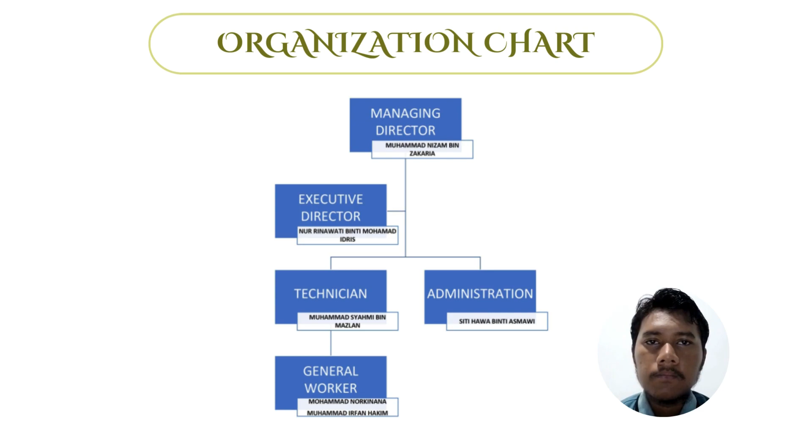Next is the organization chart. Firstly, Managing Director Muhammad Nizam bin Zakaria. Secondly, Executive Director Nur Rinawati binti Mohamad Idris. Thirdly, Technician Muhammad Syahmi bin Mazlan. Then, Administration Siti Hawa binti Asmawi and General Workers Mohammad Norkinana and Muhammad Irfan Hakim.

Next is my scope of work. Firstly, drilling, installation of steel rebar and grouting at the slope, and secondly, making a cube test for grouting concrete and concrete. Thirdly, make an AutoCAD drawing, and lastly, scaffolding installation.

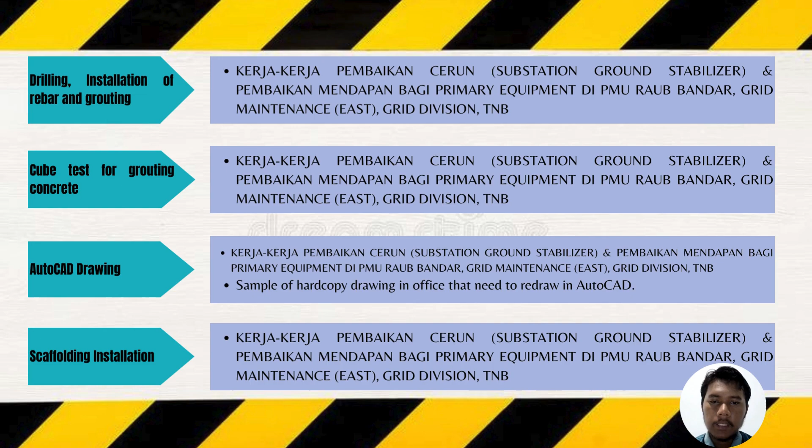For my scope of work, all of my scope of work is mainly in Raub, Pahang. The project in Raub, Pahang for drilling, installation of rebar and grouting, cube test for grouting concrete, AutoCAD drawing, and scaffolding installation.

Firstly, procedure of drilling. There are 5 steps of procedure. Firstly, place the machine on the scaffolding. The machine needs to be tied with a suitable clamp so that the machine is strong. Secondly, connect the wire from the machine to the remote control, power pack, and also the air compressor.

Thirdly, insert the drilling rod into the drilling machine. Before the rod is placed, apply oil to the end of the rod to make it easier to remove the rod when the drilling is done. One rod measures 1.5 meter and 75 millimeter diameter. Total length for nailing are 18 meter, 12 meter and 6 meter.

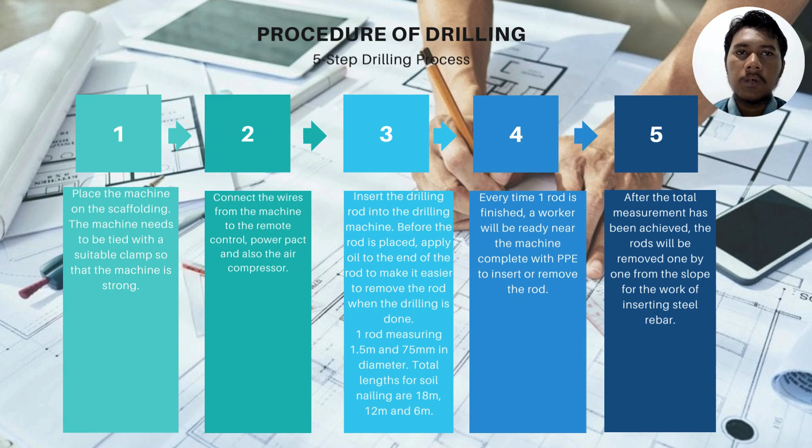Procedure of installation of steel rebar. There are 5 steps of installation of rebar. Firstly, make sure the steel rebar has been checked and has the correct thread on the end. Secondly, the steel rebar length for the lowest, second, third and last slope section of section B should be 12 meter, 18 meter and 6 meter. While the lowest and uppermost slope in section A should be 6 meter and 18 meter.

Thirdly, place the centralizer on the steel rebar. The purpose of the centralizer is so that the rebar does not sag and can fit in the center of the hole of the slope. Fourthly, place the poly pipe and tie it to the iron using iron wire. The purpose is for grouting concrete to enter through the pipe and fill the slope hole.

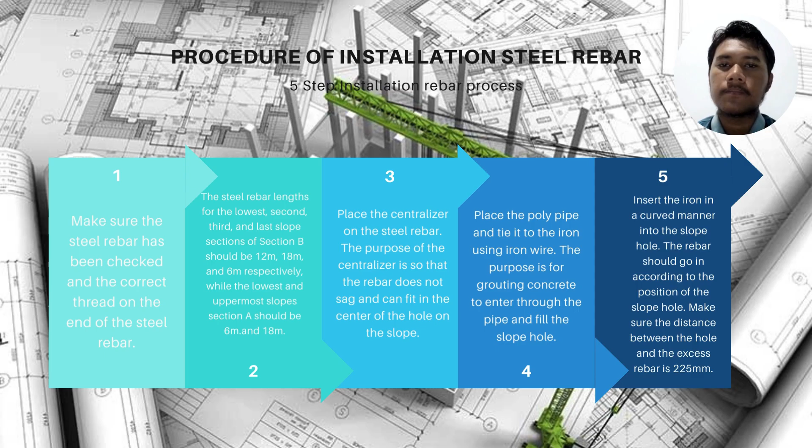Next, the procedure of grouting. There are also 5 steps of grouting. Firstly, use the design that has been prepared. In the design, the required amount of cement, water and admixture has been specified. Secondly, use a grouting machine to mix the grouting mixture.

The mixture will be put into a temporary poly container before the suction is inserted to enter the grouting pipe. Next, after the mixture is poured into the poly container, take some of the mixture and pour it into 6 cubes measuring 100 mm times 100 mm times 100 mm.

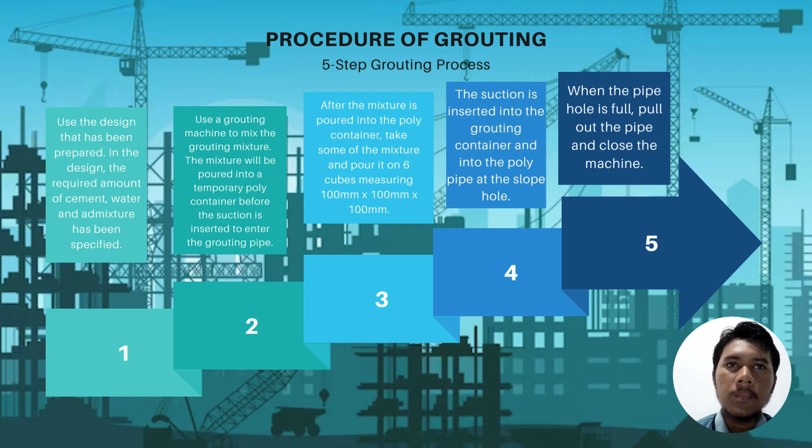The suction is inserted into the grouting container and into the poly pipe at the slope hole. Lastly, when the pipe hole is full, pull out the pipe and close the machine. This is the picture of grouting concrete at PMU Raub.

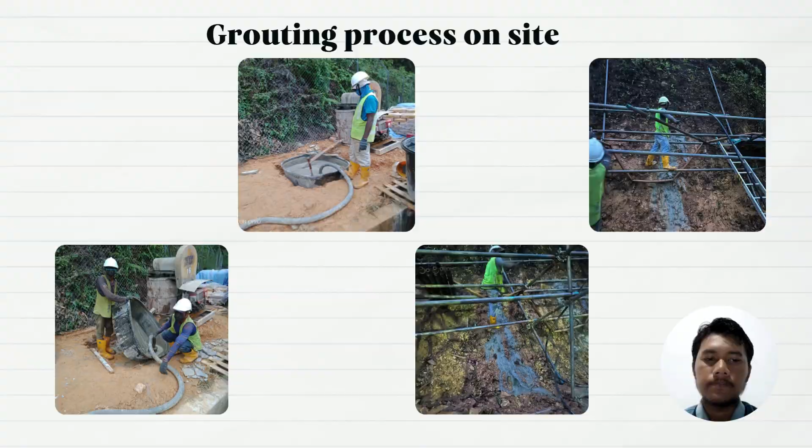Next is the procedure of cube test. Firstly, there are 2 cubes which are 100mm x 100mm x 100mm, and secondly 150mm x 150mm x 150mm. The size of the 100mm cube is for grouting, while the 150mm is for normal concrete.

The mixture has been removed while being poured on the cube. A total of 35 hits are needed for the cube to be compact at each corner of the cube. After finishing, level the surface of the cube using a cement spatula and leave it for 24 hours.

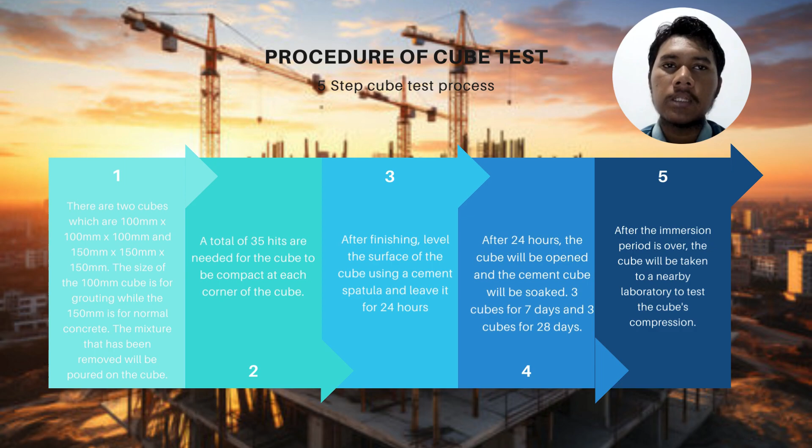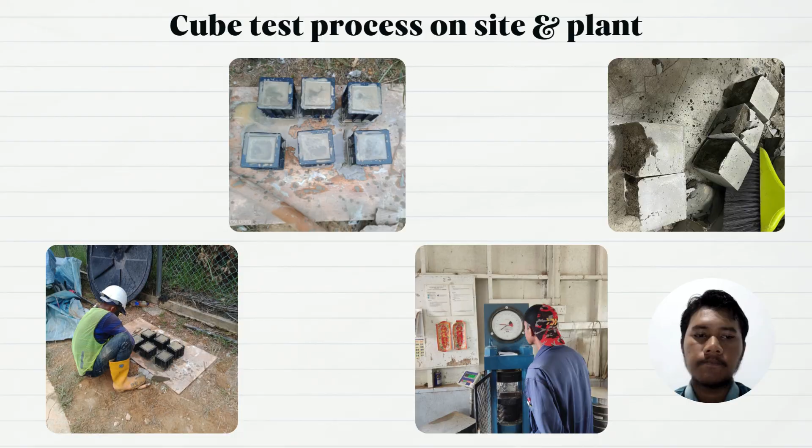Next is the installation of scaffolding. Firstly, before scaffolding installation is carried out, workers must attend a scaffolding erector course. The purpose of the approved course certificate is to prove that a person can install or monitor workers installing scaffolding.

Secondly, read and understand the design for scaffolding first. After getting approval from PEPC, Professional Engineer with Practicing Certificate, scaffolding installation work can continue. The scaffolding inspector needs to be on site to see how the scaffolding is installed correctly.

After the inspection, the scaffolding permit will be opened and the green scaffolding tag will be hung on the scaffolding. The tag needs to be renewed every 7 days, or when there is a change in scaffolding or bad weather. For scaffolding installed above 2 meters, a body harness needs to be used for installation of the higher part of the scaffolding.

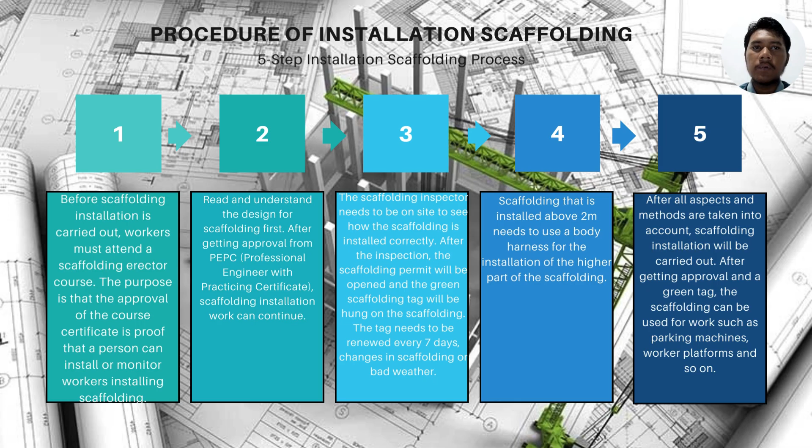The things that I acquired throughout the industrial training: firstly, for drilling installation and grouting, knowing the correct way of drilling, methods and machine needed. Secondly, a suitable drilling rig is very important for drilling work.

Thirdly, knowing the type of soil during the drilling process. Fourthly, knowing the function of centralizer, coupler, thread on steel rebar T32. And lastly, knowing every measurement and reading must follow the design or drawing that has been set.

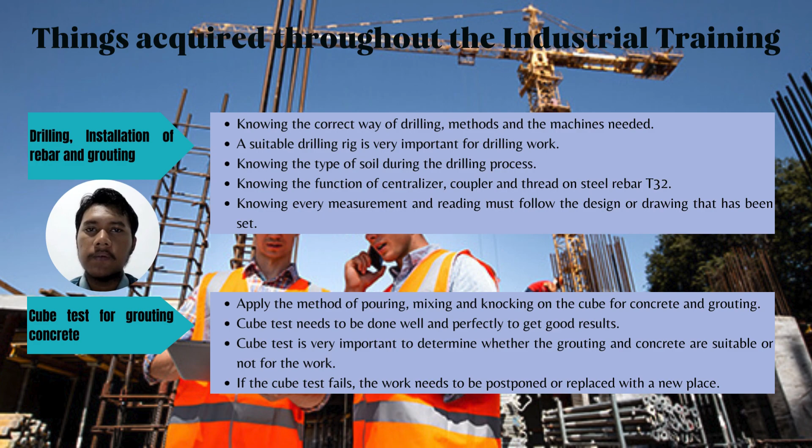For cube tests for grouting that are acquired: what I achieve is applying the method of pouring, mixing and knocking on the cube for concrete and grouting. Next, cube tests need to be done well and perfectly to get good results. Third, cube test is very important to determine whether the grouting and concrete are suitable or not for the work. Lastly, if the cube test fails, the work needs to be postponed or replaced with a new place.

For the AutoCAD drawing, firstly, I need to apply and practice how to use AutoCAD. Secondly, the finished drawing must be checked first before getting confirmation. And lastly, determination of micropile points and soil nailing using drawing from the surveyor. From the drawing, a shop drawing can be produced.

Lastly, scaffolding installation: I learned the method before, during and after scaffolding installation work. Secondly, knowing about the necessary things such as scaffolding drawing, certificates for erectors and so on. Lastly, knowing about the type, thickness, size and the like for scaffolding installation.

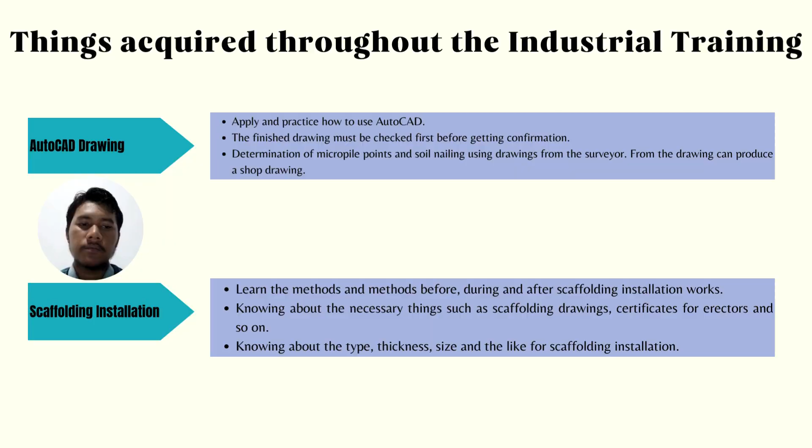My suggestion for improvement for this company: firstly, increase the number of staff or employees for large or small projects. Secondly, providing an expert or mentor as a guide for practical students. And lastly, ensure sufficient manpower for a project.

My conclusion for industrial training is that industrial training gives students exposure to the company and the scope of work, and applies what has been learned at university. Communication skills are very important for project success. This can launch the progress of the project, and also provides an opportunity for students to demonstrate skills and ways to work based on the instruction and task given.